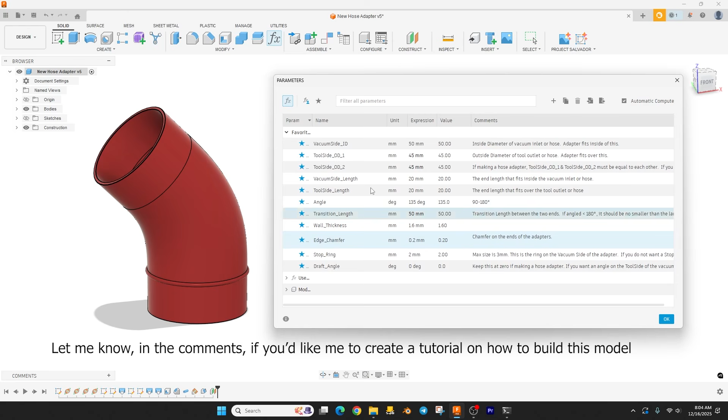Hey everyone, in this video I'm going to go over my hose adapter or hose nozzle model so you can know how to change these parameters. If you open it up in Fusion, this is what it will look like in the parameters panel. If you open it up on Maker World and customize it on the website, you'll still see all of these options. It'll just be on the website instead.

Okay, I'll go through all of these parameters here really quickly, and I'll go over in a little bit more detail the most important ones that might give you some trouble. So we have vacuum side inside diameter and then two tool side outside diameters, 1 and 2. So the vacuum side is always going to be the side with the ring here. And the reason you want to measure the inside diameter of the vacuum inlet or hose is because if this is the vacuum here, airflow is going this way.

So the hose will fit over top of the adapter here, which means this little ridge here on the adapter will be kind of facing with the airflow. So there won't be a ridge here to create a bunch of turbulence or have debris get caught. So the vacuum side fits over top of this adapter. And the tool side, so again, vacuum's down here, tools up here, the tool side hose or the tool side outlet will fit on the inside of this side of the adapter, for the same reason. So now the ridge of that tubing or that tool will be on the inside facing the right direction.

So you're going to measure the outside diameter of the tool side hose or the tool and the inside diameter of the vacuum side. That's really important. These are also tapered. So since the hose fits over top of this vacuum side, it's a little bit smaller here than it is here. That way it gets nice and tight as you slip that on. And the opposite is true here. Since the hose is going to the inside of this adapter, it's a little larger here and a little smaller here, so it gets tight.

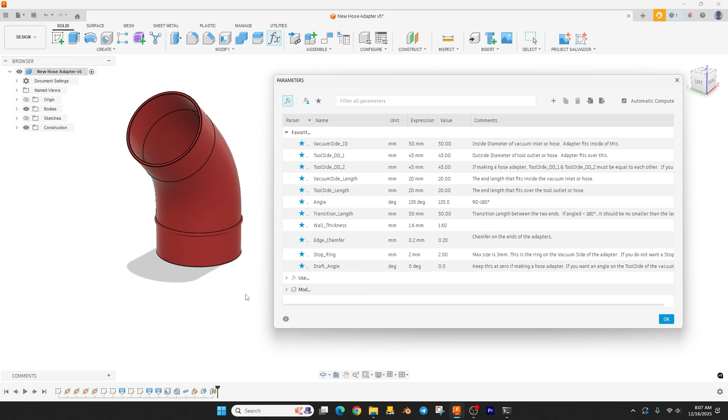Okay, so if you're creating an adapter, the tool side OD1 and tool side outside diameter 2 have to stay the same, and that makes this a perfect circle. And we'll go over why you would want to change this a little bit later. So next we have vacuum side length and tool side length. That's just the length from here to here. So basically the straight part of the adapter that slips into the hose. So you can change that length on either side however you want.

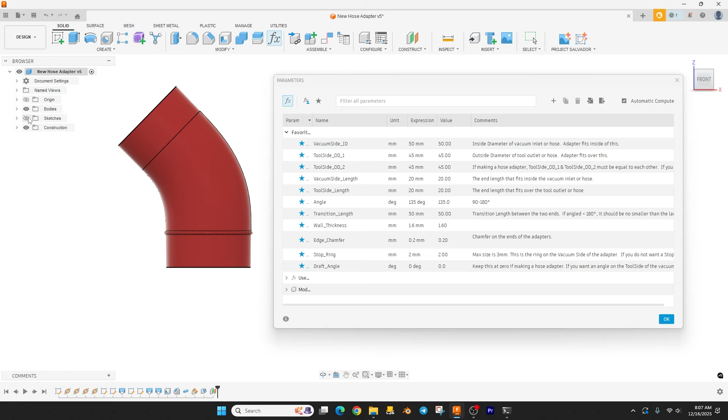The angle is pretty self-explanatory. The angle is just how this adapter is angled. So you can go between 90 degrees and 180. 90, of course, would be like a 90-degree elbow, and 180 degrees would just be straight up and down. The transition length, I'm going to turn on my sketch here, is basically the diameter of this circle here. There's a little buffer here, so there's like a 6mm buffer on each side of that circle.

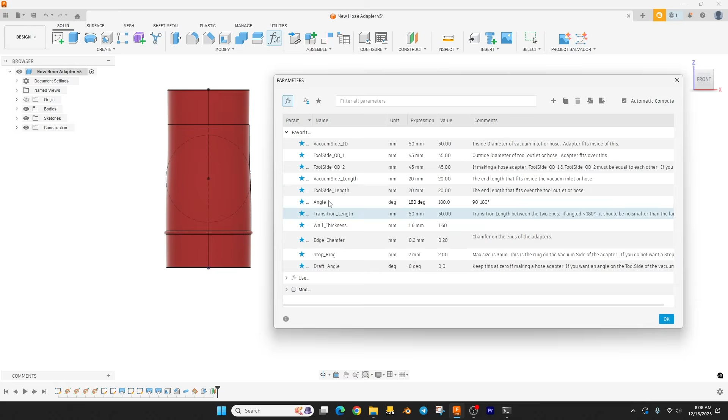But basically, if you have this set to 180 degrees, so it's straight up and down, you can make this transition length much smaller so you don't have such a long transition. You could make this like 6, whatever works for you to make that smaller. However, if you're going to have an angle, so I'm just going to bring this up to like 20. If you have an angle, we're going to go to the extreme, and let's say we go to like 90, you're going to see the model break here.

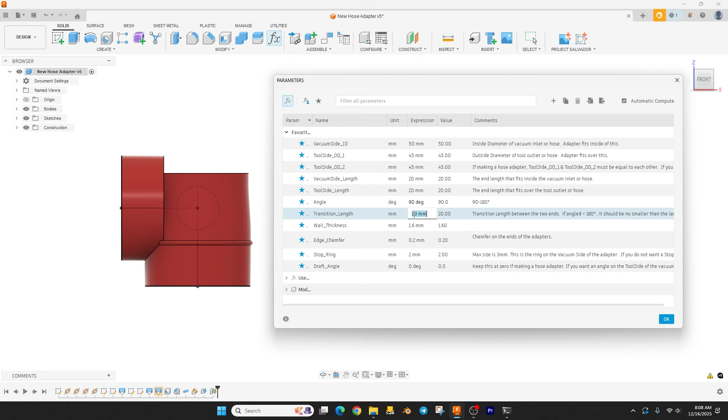That's because this line right here rotates around this circle, and so this circle has to be at least as wide as the widest diameter. So you can go up to your vacuum side, these three right here, and 50 is our largest. So you want this transition length to be 50. And now it'll work. Now you can always make it larger.

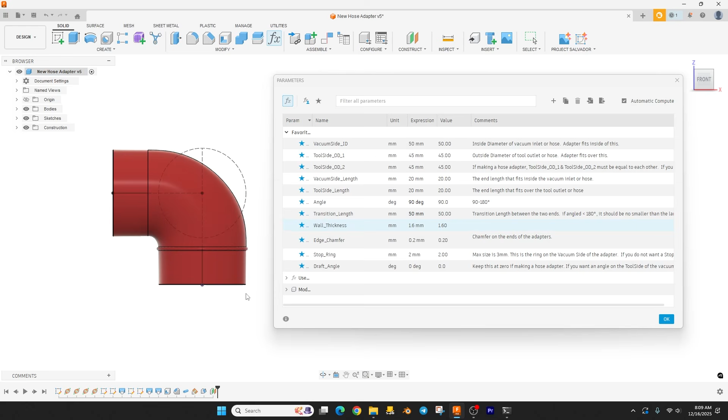So I could make this 75, and that just makes that elbow a little larger. But if you're doing an angle, you don't want the transition length really smaller than the largest diameter up here. I hope that makes sense. Otherwise, you'll break the model. And I thought about adding some limits to that, but it got a little complicated, and I figure just explaining this is easier. Okay, so wall thickness, that's pretty self-explanatory, thickness of the walls.

We have edge chamfer, that is the size of this chamfer on the edges here. And stop ring, that is this right here. The stop ring, remember, is always on the vacuum side. And you can't see it here because it gets cut off, but the max size is 3 millimeters. So you can take this up to 3 millimeters and I didn't allow it to go any higher than that. So if you type in 4 here, it stays at 3 millimeters. It can't go past 3 millimeters.

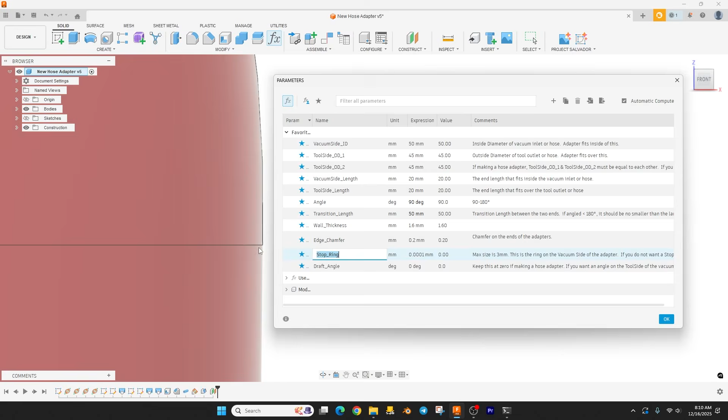And the reason for that is because as you get these 90-degree bends, that ring can kind of interfere with this bend and cause some errors. Now, you cannot set this to 0 because it'll throw you an error. So if you do not want a stop ring, you have to set this to like 0.0001 or something like that. So make it really small, and that essentially gets rid of that ring. So let's take this back up to 2.

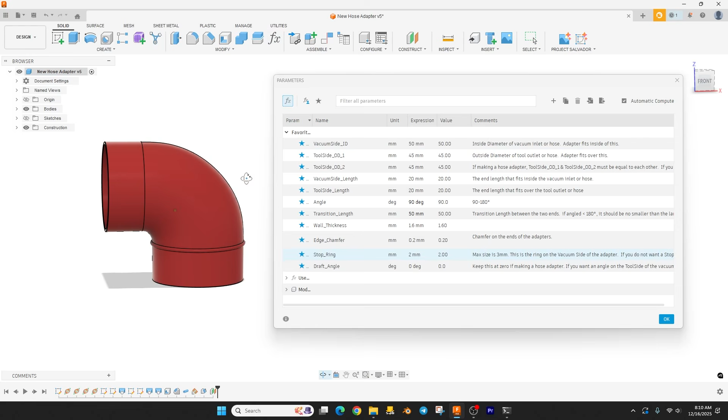Okay, so that's the stop ring, and the point of that, of course, is as you put the tubing over top of this, it stops that tubing so it can't go any further. And draft angle we're going to talk about here in a second. So that is basically making an adapter with this. But let's say you want to make a vacuum nozzle instead. Well, let's just make a less harsh angle. So let's go to like 170. So there's a little bit of an angle there.

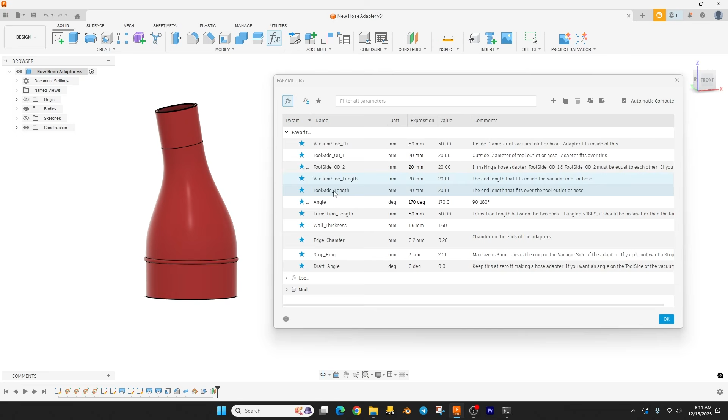And let's say we want to taper this down to like 20. And remember, these have to stay the same, OD1 and OD2, if you want this to be a circle. So now we have a much smaller nozzle here. And let's say we want the tool side, remember there's always this side, we want this maybe longer. So let's bring this up to like 50.

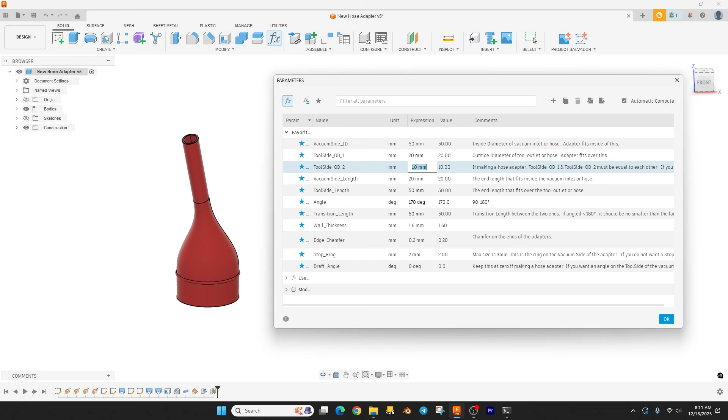Let's say you want this nozzle to be more flat, like a flat nozzle, so you can get into crevices and stuff. You can change one of the ODs depending on what direction you want it. So let's say I make this one 10, and it'll now make this flatter in one direction. It'll make it like an ellipse. Now, I wanted it the other way, so I'm going to put this back to 20 and this back to 10. And now we have a flat nozzle that can get into crevices.

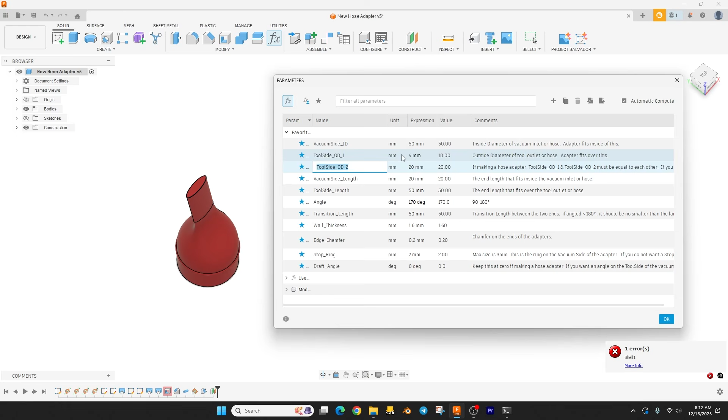Now, of course, depending on a few things, like the size you make this end, wall thickness and stuff, you can break this model. So you wouldn't want to put this down to like 4. I'll get an error here. It kind of breaks the model when you go too small, so you have to be careful with that. But if you're just working with not so extreme measurements, this should all work. And you can also then change the degree. You can even go back down to 90 degrees on this one. So any angle you want to make this nozzle.

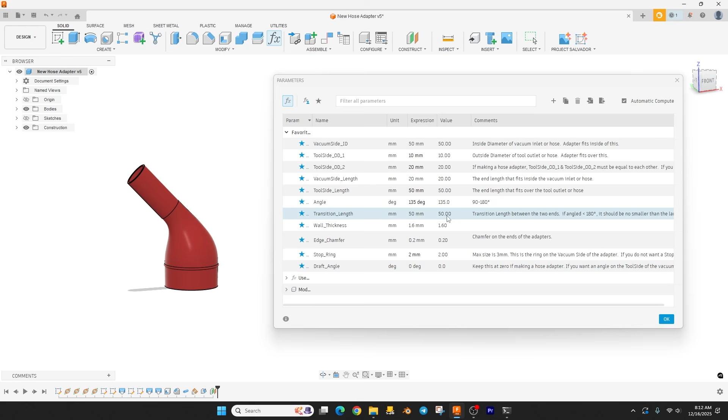So here's the really cool thing, this draft angle. Let me bring this up. I don't like that harsh angle. This draft angle will change the angle of this nozzle end. So remember, if you're making an adapter, a hose adapter, this always stays at 0. But let's say I want to put a little angle on that. Let's say maybe like 35 degrees. Well, now that angles the end of the wand.

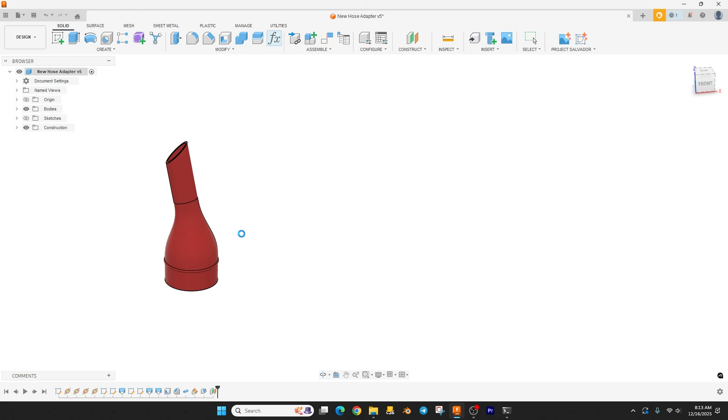So there you go. There is my hose adapter / vacuum nozzle. It's pretty robust, but like I said, it can throw you some errors if you're putting in some extreme numbers.